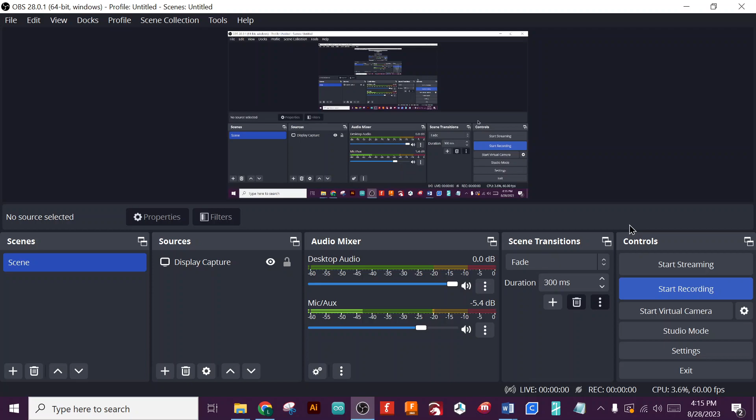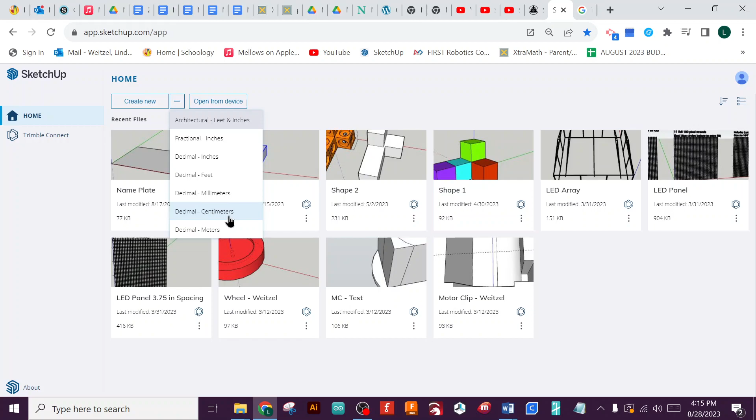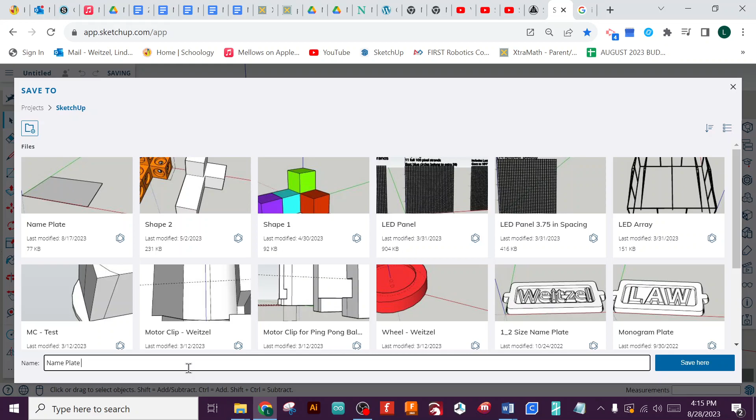Okay, so we're going to start off on SketchUp, and this is really important. You have to go to Home and go to the Create New bar, and there's a drop down where we're going to actually select decimal centimeters. So you open that up, click that. Okay, this guy right here, we're going to call name plate in centimeters, CM, nameplate CM, okay?

All right, so I'm going to get rid of our little guy here, put a rectangle here, gesture like this. Totally fine that it's enormous right at this moment.

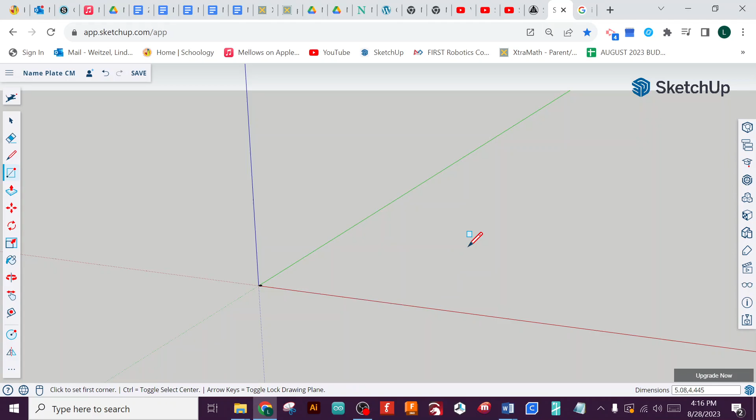We're going to do, our rectangle is going to be 5.08 by 4.445. We're going to hit enter, and it's going to give me this teeny tiny guy right there. I'm going to tap the space bar to get out of that key, and I'm going to center this.

Okay, we're going to grab the measuring tool. It's easy to go from the midpoint. If you can grab that midpoint, there it is. I'll grab this one. Okay, we're going to come out this way, and we're going to type in

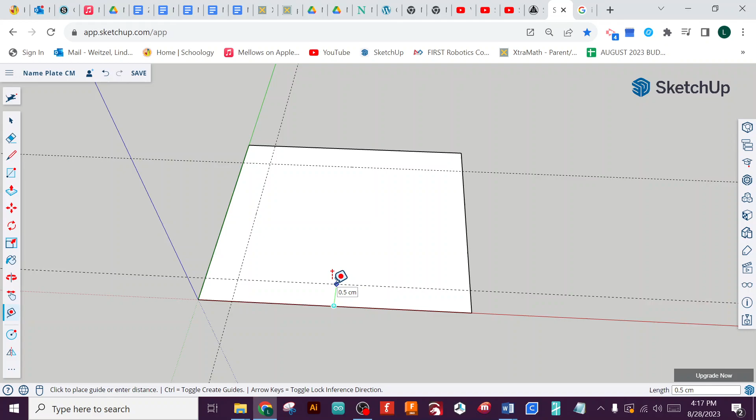0.635 and hit enter, because everything is automatically in centimeters, which is really nice. You don't have to put the inch markings or anything. Click here, come out, 0.635, you can see that shows up in the lower right-hand corner. Hit enter, there it is. We're going to make sure that we're on that green axis and go 0.635 and hit enter.

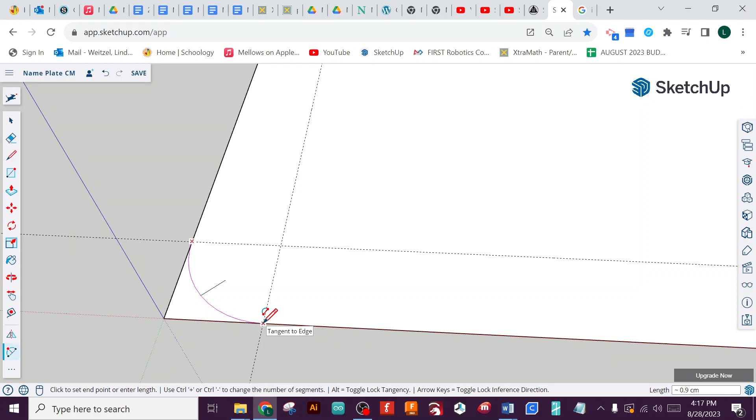Okay, right now we're going to grab the 2-point arc tool, which is in here. Looks right there. I'm going to zoom in on this, and we want the X, and we want that pink line like that. And then just click on that tangent to edge.

Okay, zoom in over here. We're going to do the same thing, X and X with that pink line, and then we want that blue line tangent to edge. And tap E, get rid of that, erase, erase, erase, erase. Okay, I'm going to go over here and delete all the guides. Close that up.

Okay, so now what we're going to do is I'm going to grab the arc tool right here. Okay, and I'm going to go to that cyan dot, which is the midpoint. Click, we're going to go up, okay?

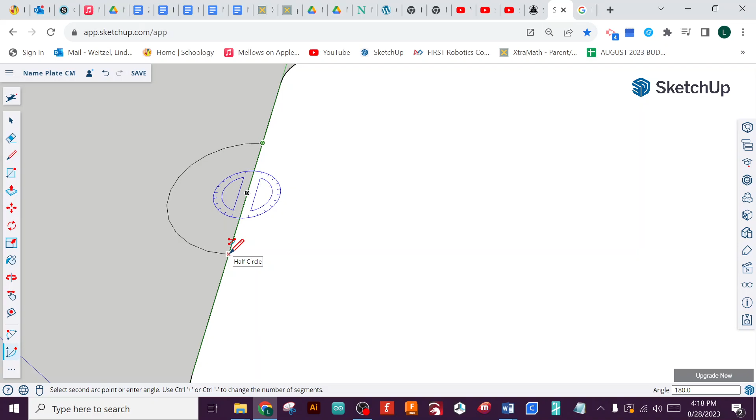And as I'm gesturing up, I can actually type how far up I want to go. So this one is going to be 0.635. We hit enter, and then from there, we're going to swing around, and then you want to connect right there. It says half circle with an X, and we click enter, okay? So that's what that's supposed to look like.

I'm going to take the line tool and draw a line from green point down here. Okay, so drawing that line, we have to erase it later. I'll show you. We're going to tap F, which is the offset tool. And all I'm doing is moving in here. You'll see that red dot at the bottom. You click one time, quick click, and then gesture inside, and then you can move that around.

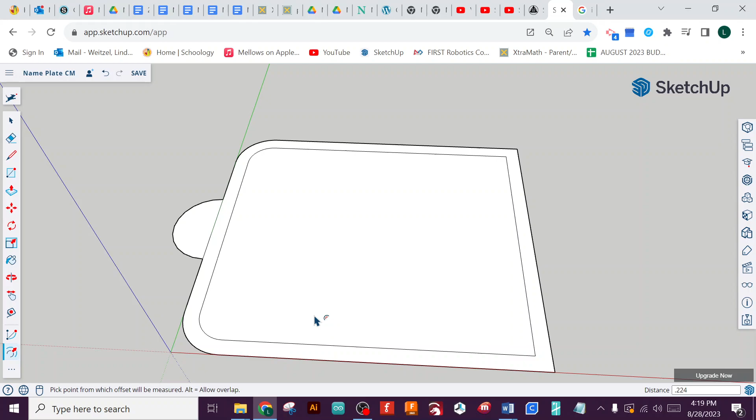We're actually going to type 0.224 and hit enter, just like that. Okay, we're going to do that same thing with the F. Tap F, you get that offset. Again, click one time, gesture inside, 0.224 and hit enter.

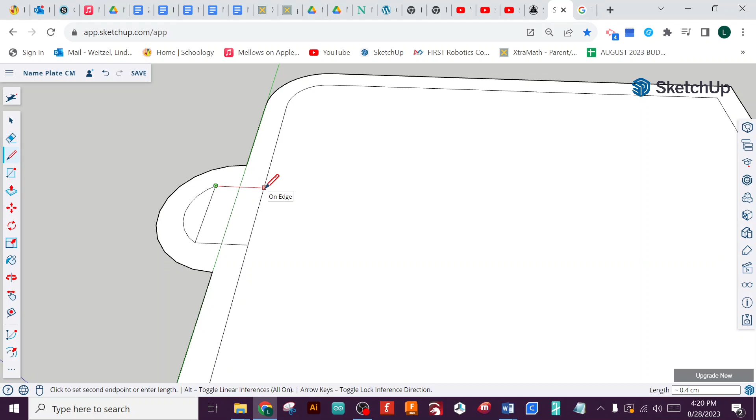Now we're going to draw some lines. Okay, there has to be a line. Click here, and you see how it goes on the red axis. It's a red line, that's what we want. Up there to on edge, click one time, gesture over, click again. We're going to come over here, click one time here, red line. Okay, click one time here, red line out.

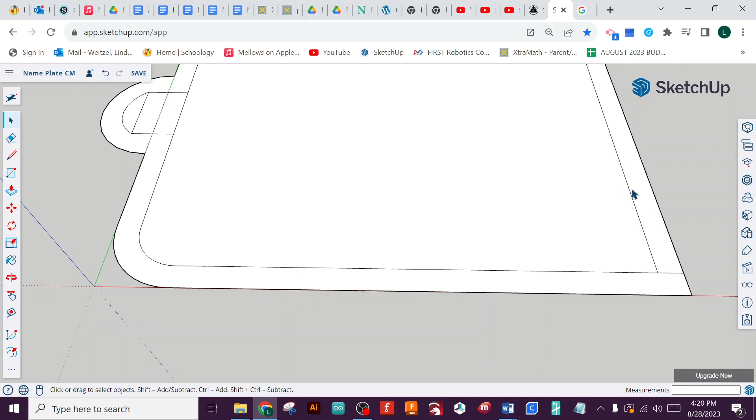Okay, and do a little erasing now. You can either select with just the spacebar select. So click here, delete that. I'm going to go up here. We're going to delete this. We're going to delete this guy. That's super important. Delete this guy. Delete this. Nope. Delete this guy and that.

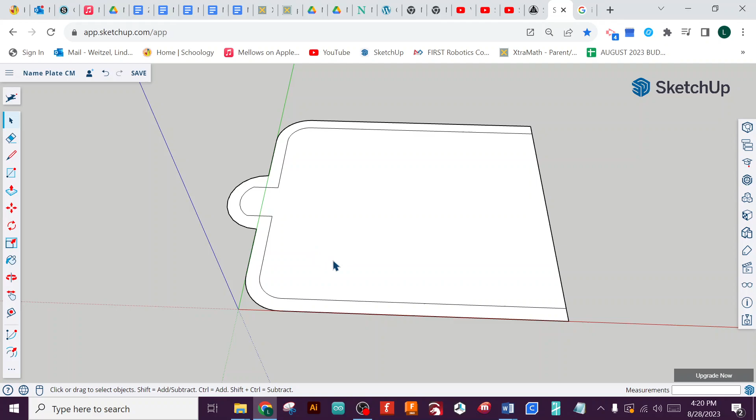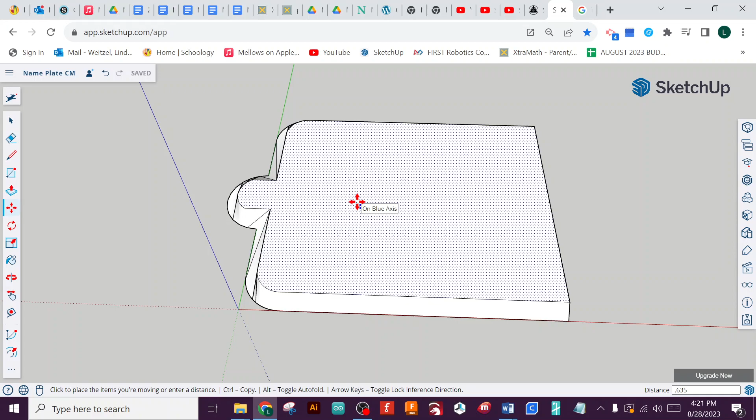Okay, with all of that done, you tap the M tool. We're going to click here and we're going to move up. We move around, you can click and you'll see that blue dot disappear. And then we're going to hit the up arrow and it locks it, it says on blue axis. We're going to gesture up and you're going to type 0.635 and hit enter. Okay.

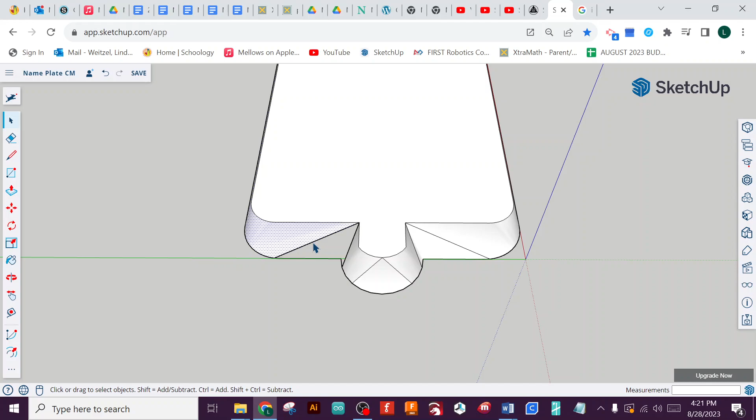So that's looking pretty good. So we're going to turn around here. And you can see that this looks a little funny. So what I'm going to do is delete some faces, delete that face. I'm going to delete some lines, actually delete some lines, until you'll see the whole thing snap back.

There we go, that's what we want, okay? So we want it to look like that. We're going to do the same thing on the other side.

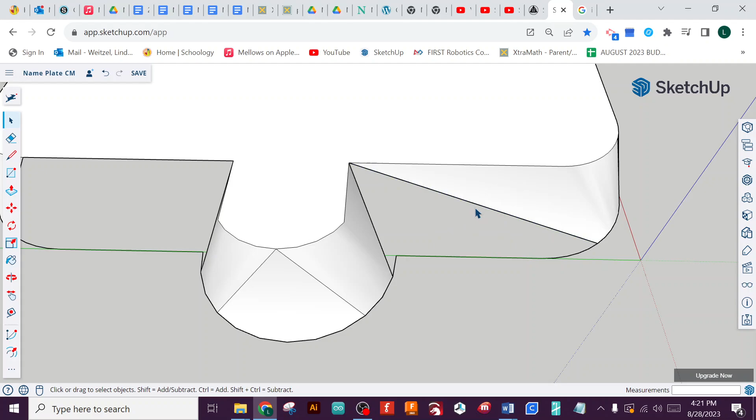Okay, we also want to delete this face. It's kind of a weird shape, so we don't like that. We're going to delete it, and then rebuild it in a way that the 3D printer is going to understand.

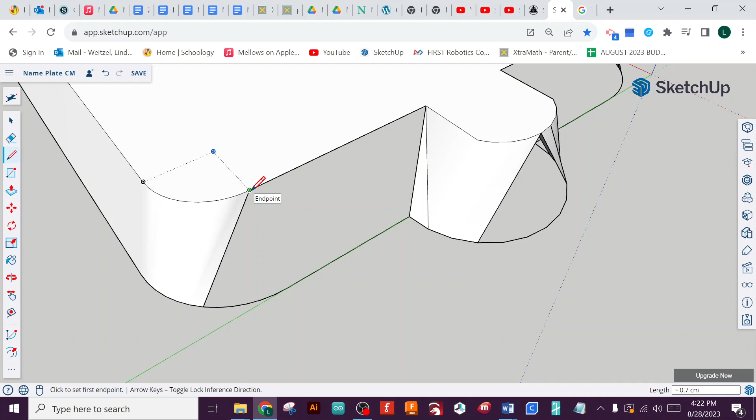I'm going to click here to here. This is just from experience. We click one time up here, then zoom down, and go to not the blue dot, but the green dot. I want green dots, so up at the top, and then find the other green dot.

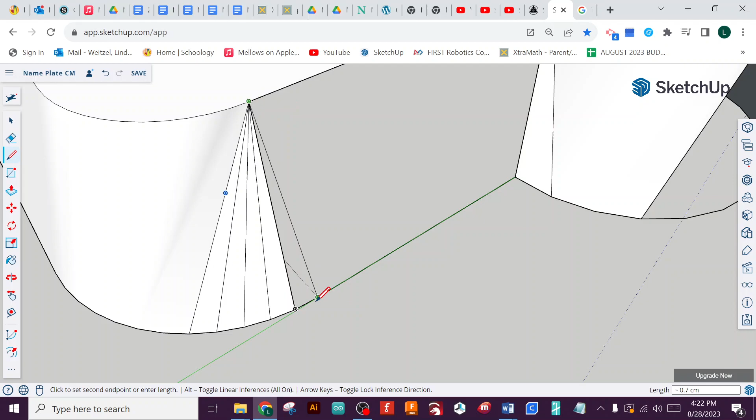We're going to keep doing this until the whole side heals itself. Green dot, not the light blue dot, the green dot. All of a sudden, the whole thing is going to just create a face here. There we go, that's what we want.

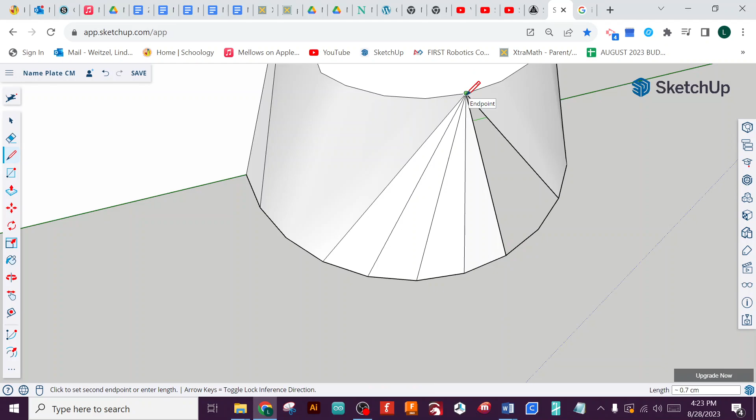Okay, I'm going to do this in the front here. Up at the top, green dot, the top, green dot, click, click. I'm going to do the same thing over here. Green dot.

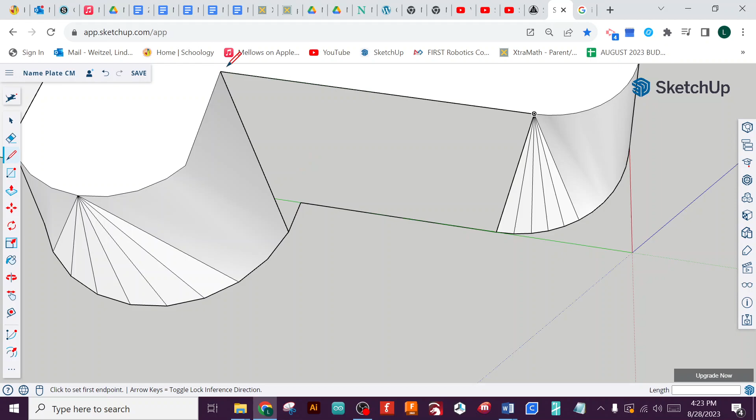Eventually it's going to snap into place and the whole thing is going to heal itself. Ah, I know why, I didn't do this guy. So we go from here to here, and bang. Okay, so all of that is healed and whole and that is looking correct.

Now what we're going to do is click on the top with F, the offset tool, and we're going to come in and click here again and gesture inside. I'm going to go 0.635 and hit enter. Now you'll see when we did this, it pulled in too much to keep the rounded edges.

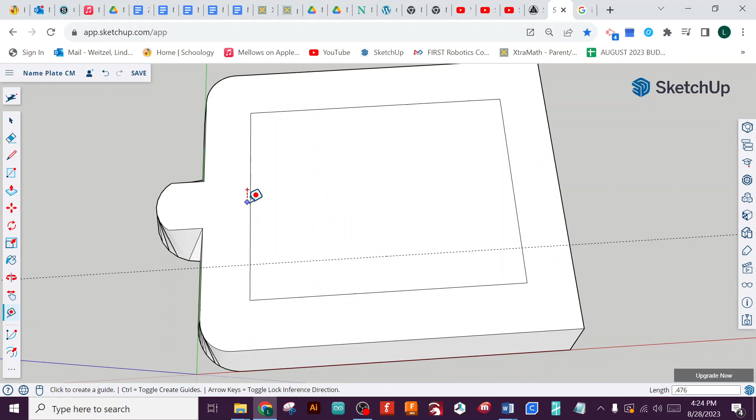So we have to put the rounded edges back. I'm going to go back to my guides, go to this blue dot and gesture inside, and type 0.476, hit enter. Find that middle dot, midpoint again, there we go, 0.476, hit enter. Midpoint, cyan dot, 0.476, and hit enter, okay.

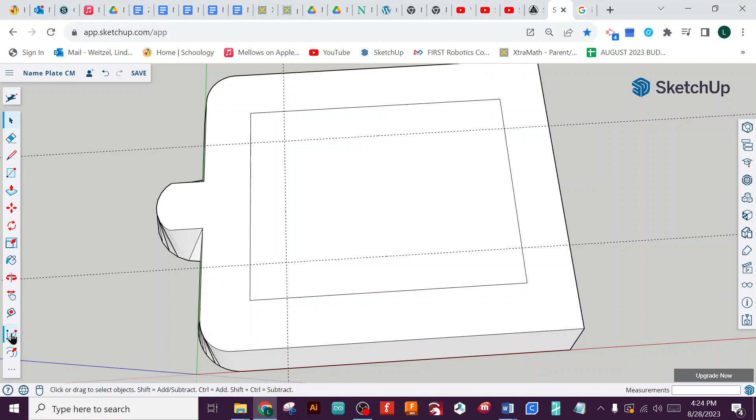We're going to go to the 2-point arc tool. That is in here, zoom in, do that one again. Intersection, intersection, and we want to do on face for this guy. Erase, we're going to erase that line, erase that line.

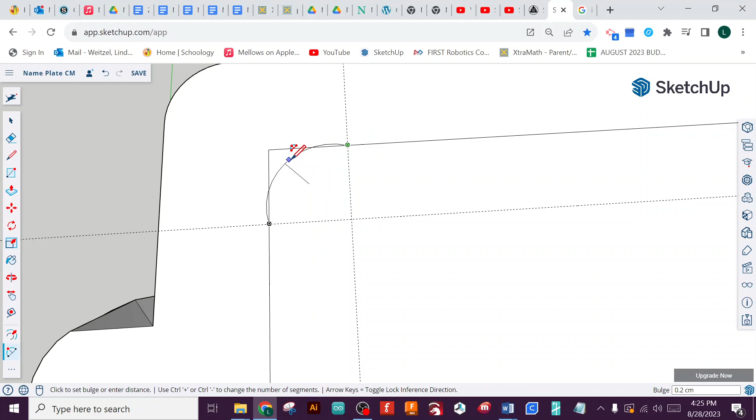This guy up here, zoom in, 2-point arc. It's going to go here and here, and we want to go on face, but make sure that it is - there we go. We want to make sure it's inside. If it's bulging out like that, we don't want that. We want on face like that. E for the erase tool.

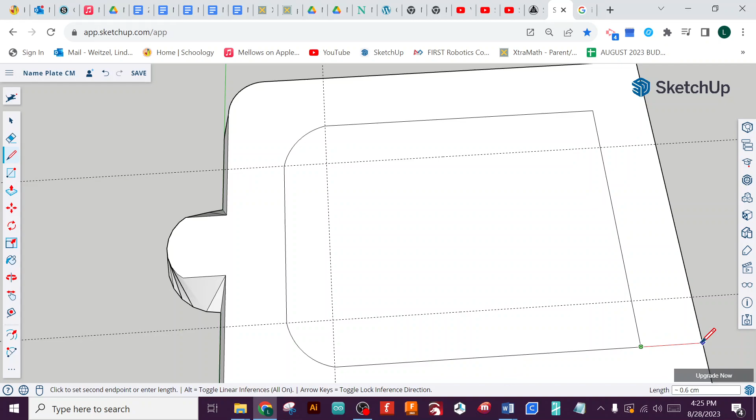And then we're going to draw outlines like this from here to here and from here to here. I'm going to delete this line, delete this guy.

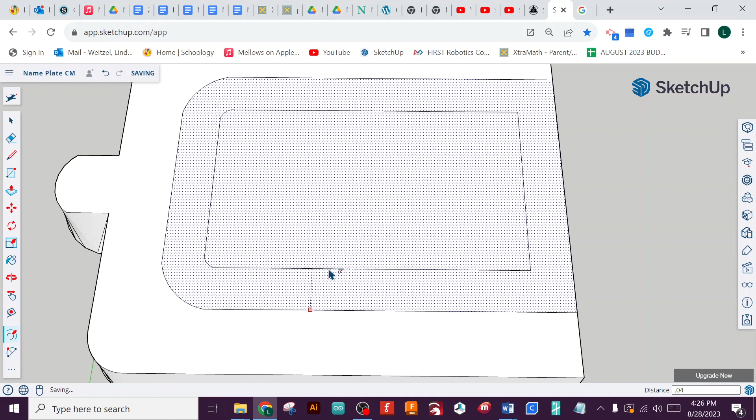We're going to do an offset, F, the offset tool again. Click one time, gesture inside, and this is going to be 0.04. All of these are a little strange because they are brought in from standard units.

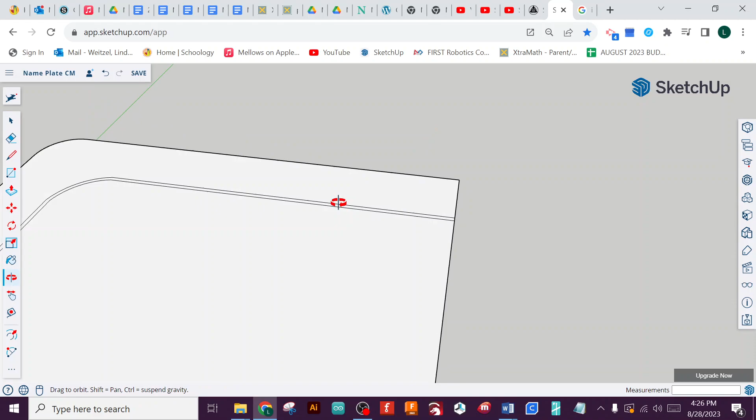So we're going to use the line tool, bring that out. Again, line tool, bring this out like that. Select this and delete it. Okay, so we've got that kind of little lip there, which is fine.

I'm going to move to the front of this and tap line tool again, draw from this corner all the way to this corner, and that heals that edge. See, they're all white. Okay.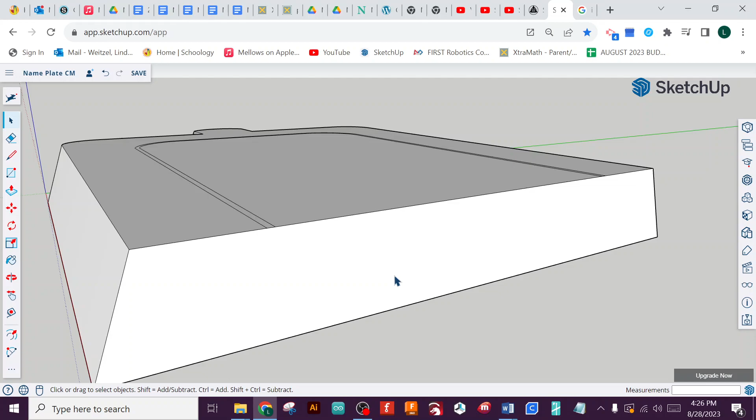If for some reason your faces are blue, you can right click and hit reverse faces, and then that will turn it - we need them all to be white. Just in case yours turn out blue someplace, they need to be white.

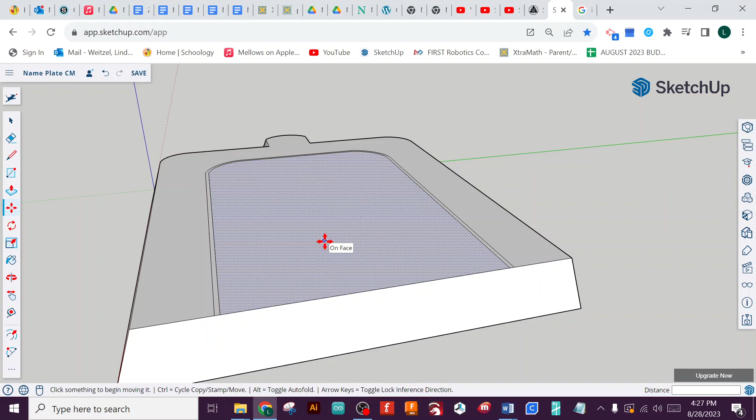One of the last things we're doing - we're going to select over here, click here, this is the move tool again. So we click one time and then up arrow, that goes on the blue axis, and we're going to go down 0.3175 and hit enter. Okay, and we are almost done.

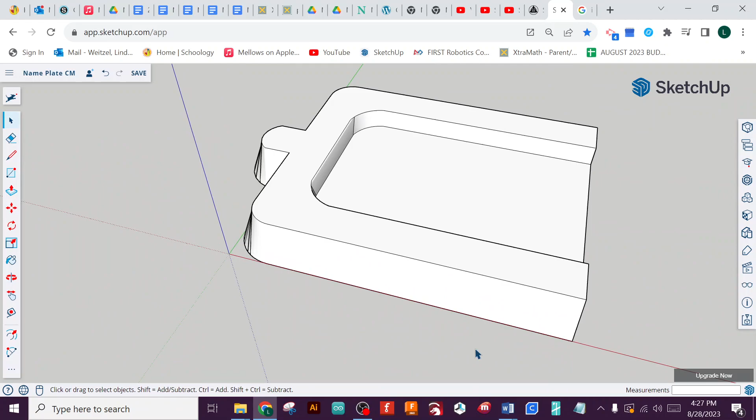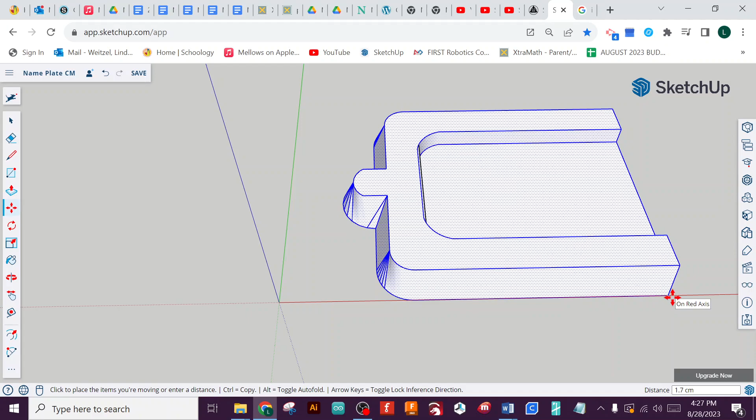So we're going to select this entire thing, hit the move tool, and then start moving it with the endpoint to the right. But as I do this, I want you to tap the control key, one time, and that leaves a copy behind. So I'm going to move that over there just like that. Still selected, we left a copy behind, which is super cool.

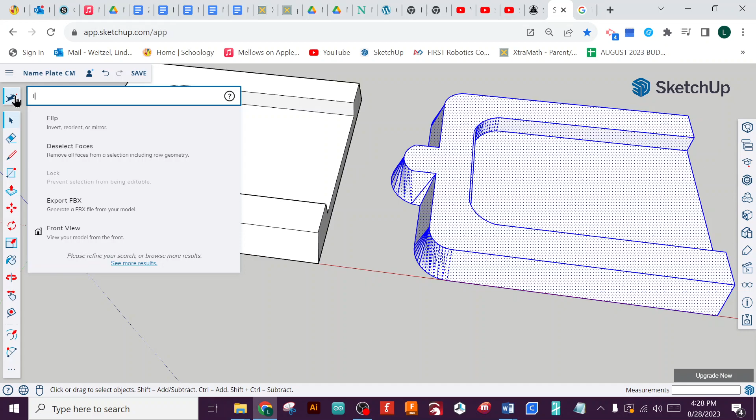Now we're going to go up to this little dog right here, that's a little dog chasing a ball. You're going to type the letter F, and it gives you these tools that are hidden. So we want this flip tool. We're going to select this red axis like this, and that flips the entire shape around.

We're going to go back to the move tool, select here, and then move back and just mate it like that. So that's what we're looking for.

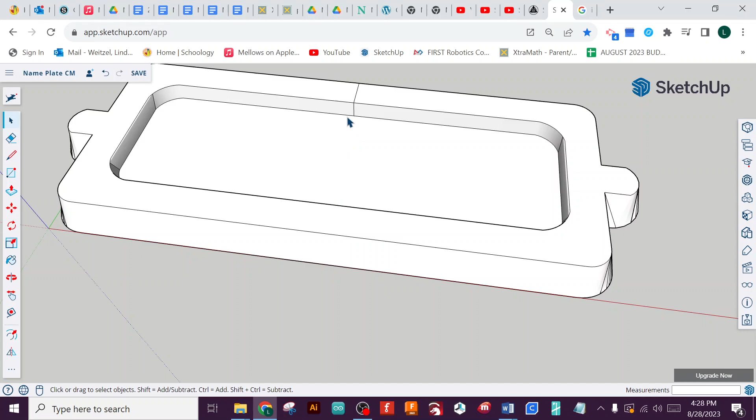I want you to delete all these lines, and then we're on to the next. Let's see, delete those lines inside, and then it has healed itself and become all one shape. This one, and there should be one down here.

And okay, we're going to select the entire shape like this, right, and just hit make group. Okay, so well done, everybody.